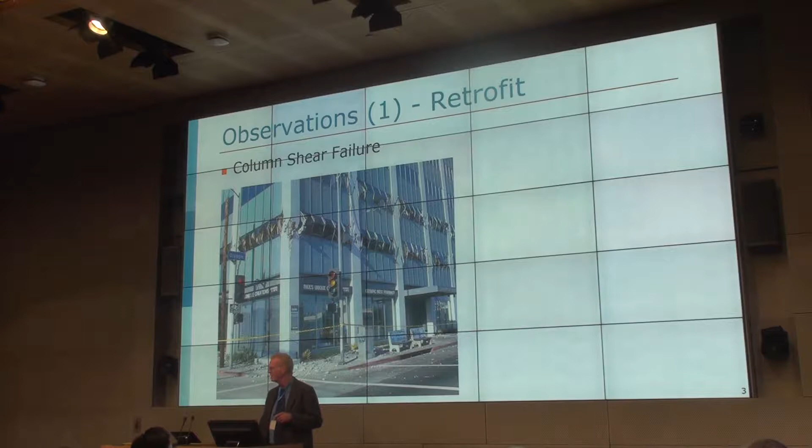Now the observations I can skip over relatively quickly because the previous speakers have kind of punched all the same slides I'm going to have up here as well. But I wanted to put these up there because it's important to set the stage. First of all, there's retrofit. We observed that in terms of existing buildings, we had some serious issues that we had to look at. That was abundantly obvious, whether it was columns or joints or walls and so forth. So that was a topic that certainly came about at this time period, the problem with existing buildings.

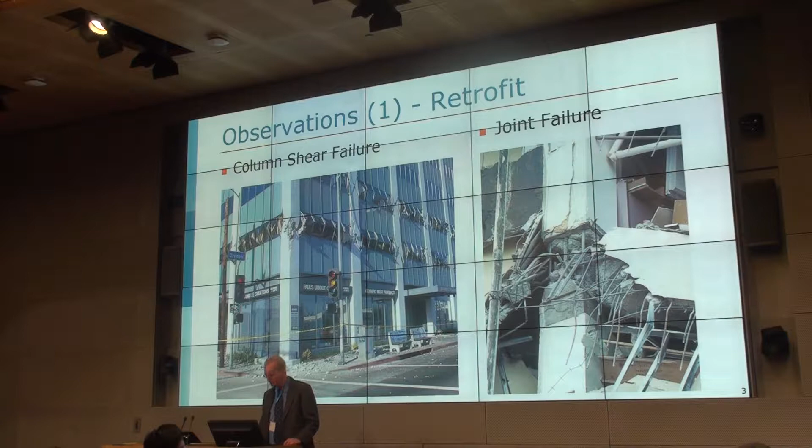And another one is a slab column punching failure for that Bullock's department store, which was certainly really interesting. We were very fortunate that many people didn't get killed, just because of the timing of the earthquake.

The other one that was kind of interesting was this idea of repair. Certainly no one really at that time was very worried about repair. We had the San Fernando earthquake and a lot of code changes had developed in the 80s and 90s, and this was the first real test of modern seismic codes. We certainly found out that we were doing better with new buildings, but there were certainly some issues. Existing buildings and repair are certainly big problems.

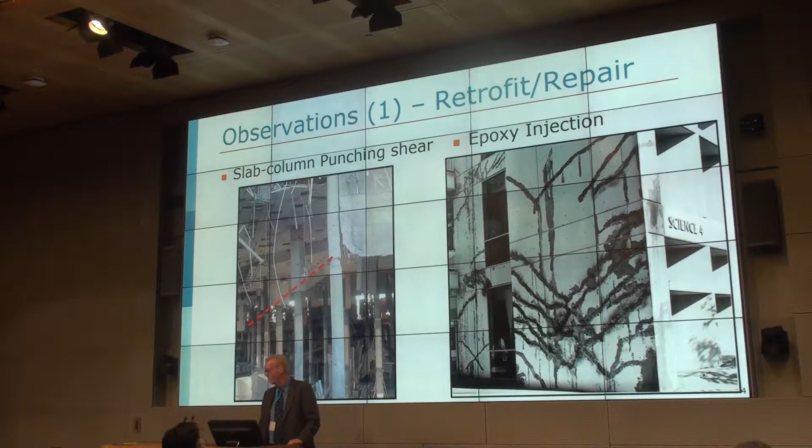Diaphragms, Jack mentioned this quite a bit, the fact that we didn't really worry about designing diaphragms, particularly these precast topped diaphragms.

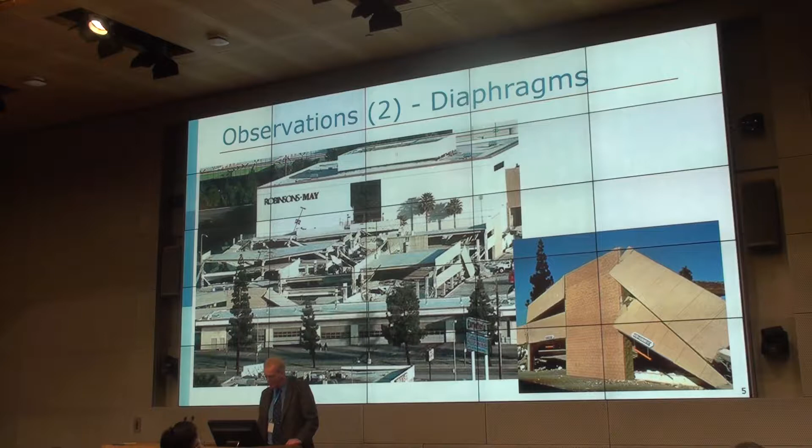And we were starting to do a wonderful job. We could detail columns that could almost bend over and touch the ground. So no one could tell me concrete couldn't be made ductile, but if you don't design the system and the gravity system is not compatible, the gravity system in this case basically failed and pulled down the lateral system. So we had this problem of compatibility.

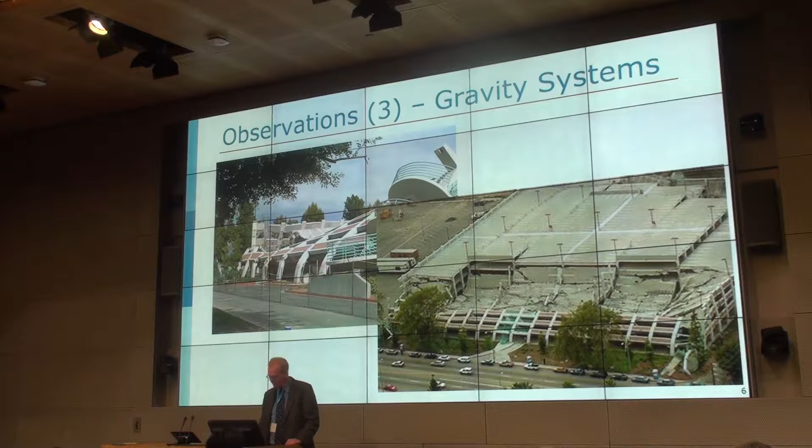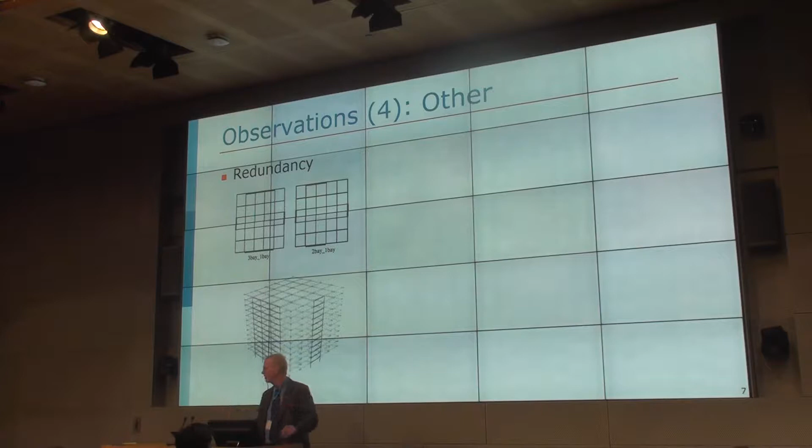I loved looking around to find something useful about redundancy. There are no good figures about redundancy other than all us academics that put 1 bay frames and then 2 bay frames and 3 bay frames. But nonetheless, that certainly became a topic of interest, the fact that we were starting to put all our eggs in one basket, and that's not a very good design philosophy. It also related to diaphragms, made them more complicated, and certainly nonlinear torsion became an issue once you started failing one side or the other. So there were these complications relative to redundancy.

Norm talked about ground motions, and I think particularly as structural engineers, we became interested, or at least noted, that there were these issues with being closer to the fault. When I started, California was basically zone 4. You didn't have to worry about anything else. It was simple. You looked up zone 4, found the Z, which was always 1, there was an S factor, and you were done. So it was simple.

I'm not sure we've come a long way with ground motions, to partially answer John Bray's question. They go up, they go down, and I don't think in some ways the ground motion side realizes how we actually design buildings with R and Cd and Omega. The granularity isn't there, I think, often to worry about whether the ground motion's going up or down 20%.

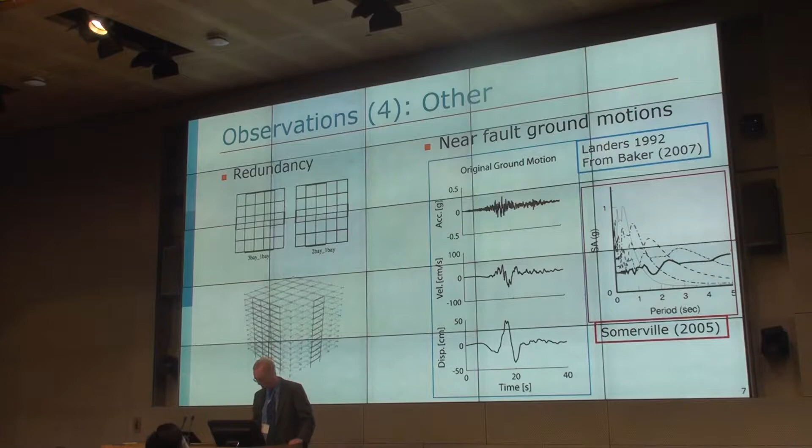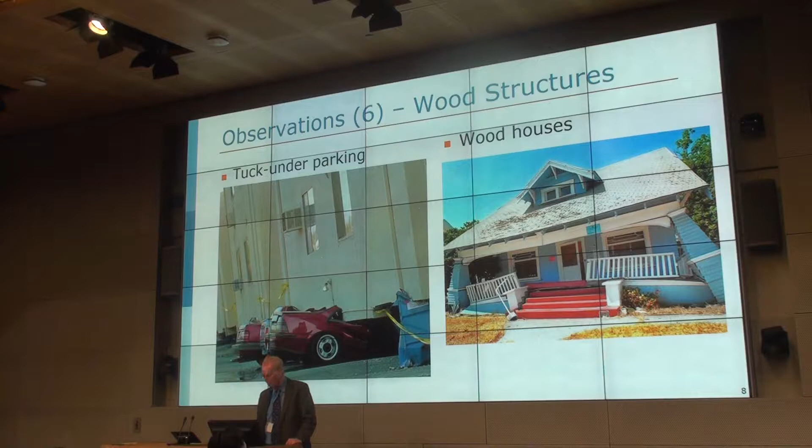Wood structures - we certainly had the tuck under parking issue with soft stories. And as mentioned, there's wood houses. We had the problem with connecting to the foundation and cripple walls and so forth. And as mentioned, there are some talks on that later.

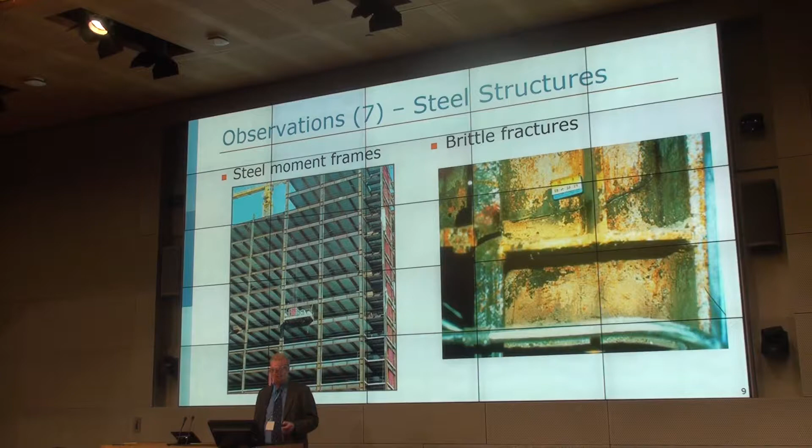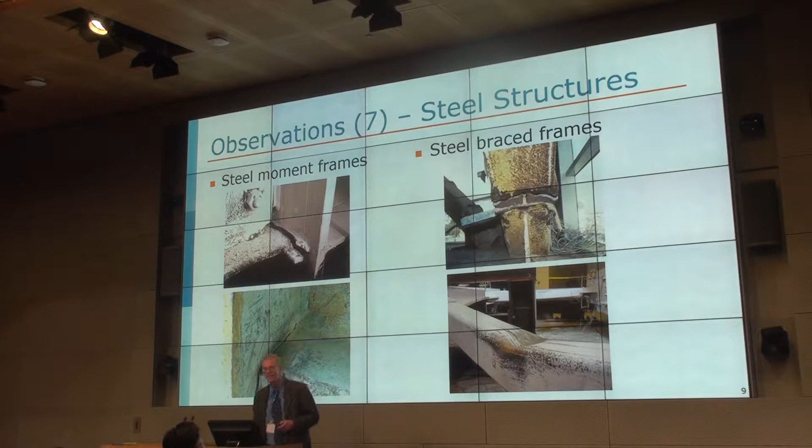And then in steel structures, particularly issues with brittle fractures were mentioned - brace fractures, fractures through columns, and some brace issues. So the idea that steel had no problems certainly came out, not immediately, but down the road. There are other things I didn't touch, like bridges, and Jack mentioned tilt-up structures. Those are certainly important as well. But when you start looking at the wealth of information and challenges, there were a lot of them.

So now quickly looking at what we've actually managed to get done in the last 25 years - certainly by Northridge, we had identified the need to retrofit existing buildings. And 25 years later, I think we still realize that buildings designed by the last building code may still need to be retrofitted in some way. We keep finding problems that we need to solve, which is good.

But looking at the progress we've accomplished in terms of guidelines and the research and data available for existing buildings, it's actually quite remarkable. It was just starting in 1994. Before that, it was like 75% of code, and in many cases, that's unfortunately what it still is. But we've now got guidelines.

FEMA developed the series - we're down to FEMA, ASCE 41. If you look at it now, ASCE 41 is something like 550 pages. The 17 version is very detailed. It's slowly gone through updates, maybe slower than many of us would like to see, but research is finding its way in there. So the development of FEMA 356 and 273, and eventually ASCE 41, that's a huge accomplishment over the last 20 to 25 years.

PEER research - as mentioned by Khalid and Jack - that focus on non-ductile concrete buildings has had a big impact, as has performance-based earthquake engineering. Those concepts were just in their infancy in the mid-90s. So that's a huge accomplishment.

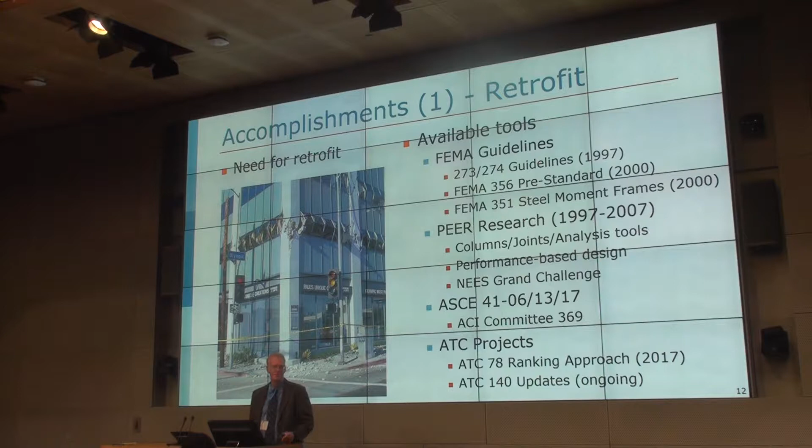Related to retrofit, there's also the effort on hospitals. I think our need - this SB 1953 - really pushed us to become better at retrofit and a little more creative. In some of the cases I was particularly involved with, we actually did building-specific testing to come up with a more economical retrofit strategy for a particular building. In some cases, you could really save a lot of money. This kind of integration, where researchers and practitioners actually get together to come up with a better solution, is something I've certainly enjoyed working on with many people in the audience, and many who aren't.

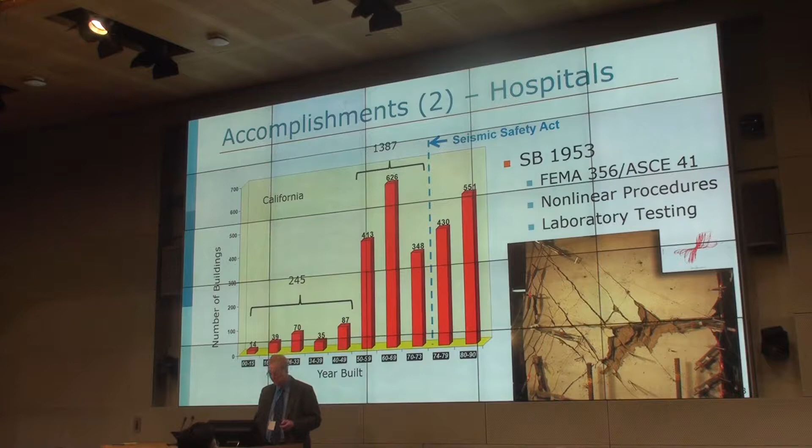In terms of retrofit, there's also the seismic ordinances - this is a big deal. We've got the LA ordinance for soft story wood and non-ductile concrete buildings. There are a number of other jurisdictions - Beverly Hills, Burbank - that cover non-ductile concrete buildings. There's also Santa Monica and West Hollywood looking at pre-Northridge steel moment frames. So this idea that we've got mandatory requirements, I think, is really important.

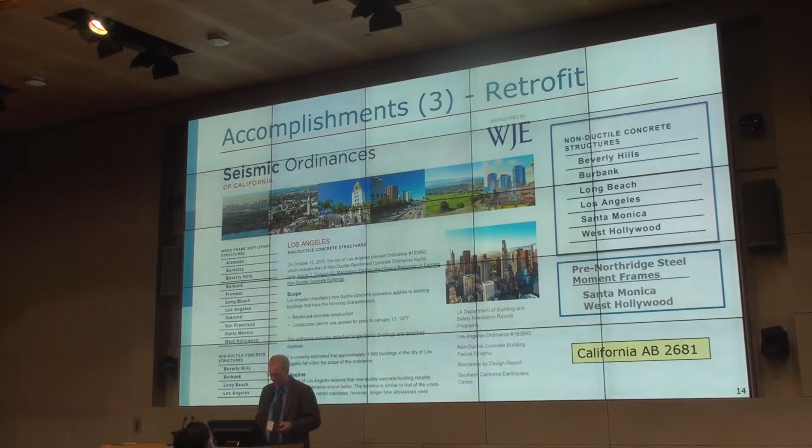It may be a little frustrating that it took 23 or 24 years after Northridge to accomplish that, but you also have to put it in context of how far we've come with analysis and retrofit approaches, and how much more educated our community is. Most of the engineers we're sending out of here at UCLA now are going out and working. I think it's trickled down as far as the amount of education involved in all the different firms. Now, it will take time.

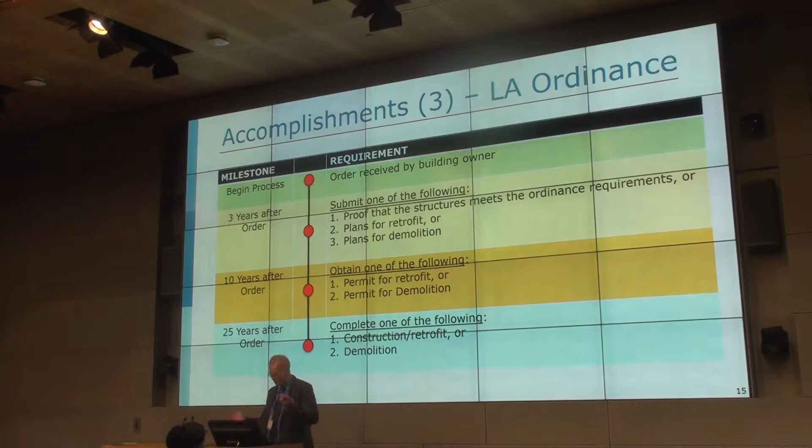So in LA, we're moving along into the 3 years after the ordinance, and we're making progress. We'll just see how long we have before that big earthquake hits, and how much progress we're able to make. But at least we're making progress, and we've got goals, and we're going to get there. We hope we'll get there faster than 25 or 30 years. Time will tell.

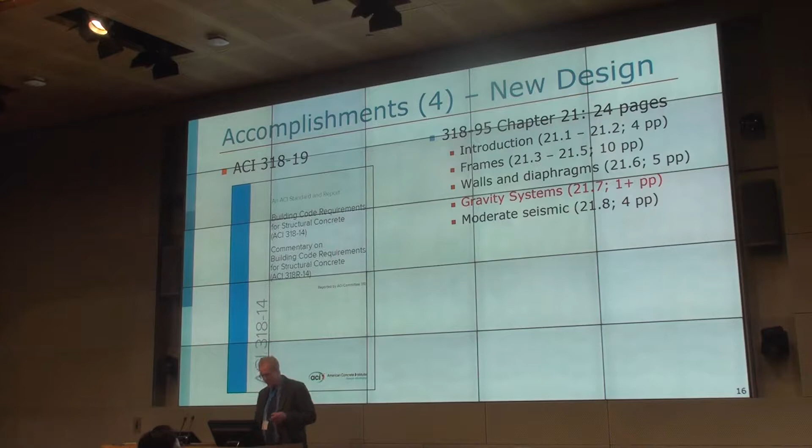Well, we go to the 14 version - it's more than twice as long. It now has foundations in it. There's a lot of material on diaphragms, and there's even more material on diaphragms in chapter 12, I think.

It's amazing the amount of detail, which is one of the reasons our engineers all need to get a master's degree in order to figure out a lot of this stuff. But certainly that's tremendous progress.

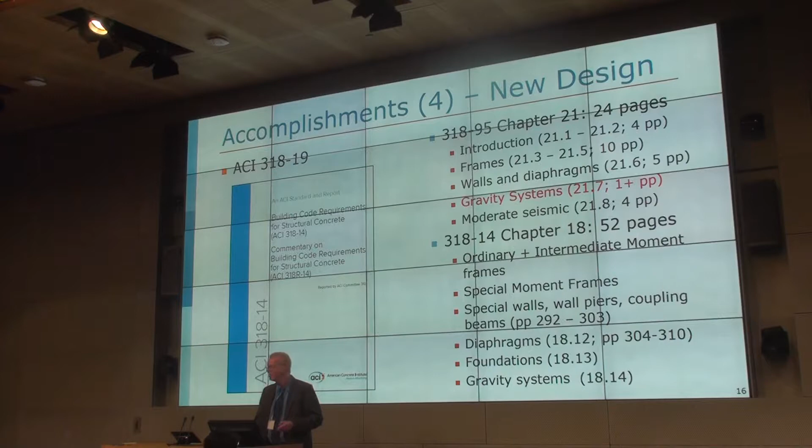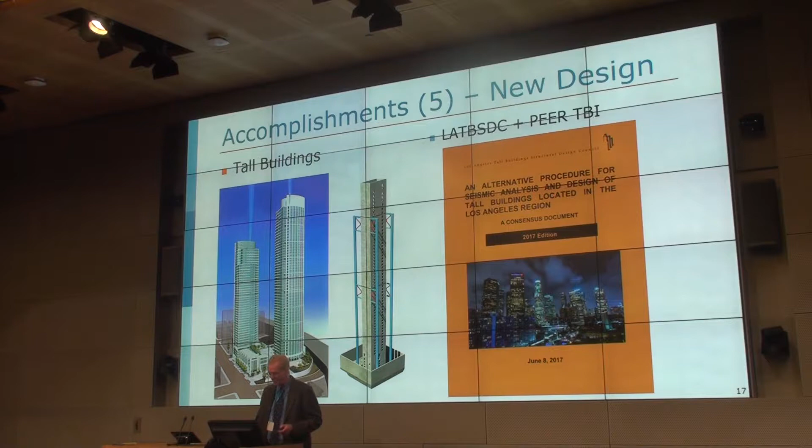The 19 version of the code has some very interesting material related to updates in seismic design, including new design approaches and integrating performance-based design for new buildings. Over the last 10 plus years, this has been a big accomplishment to actually incorporate sophisticated nonlinear analysis and design approaches into practice. This is certainly a big deal.

One of the things I've certainly enjoyed is the collaborative part of what we do. In terms of retrofitting hospitals, this is the St. John's facility in Santa Monica that got demolished shortly after the Northridge earthquake. I worked on a somewhat similar project with KPFF and OSHPD to come up with a retrofit strategy that involved testing. It was a big event in my life when I figured that it was really valuable to get out there and try to sell what you could do and work with other folks. I think we ended up saving the owners on the order of more than $30 million in this effort and giving them a better product, through all the tools that have been developed by many of the people in this room.

And then also internationally. I talked with a reporter a few days ago, and they said, well, we haven't had any Northridge in 25 years. What's driving our progress? Besides the improved laboratory facilities that we have, it's also international collaboration. They have earthquakes in Chile and New Zealand and Mexico and Japan, and now we're much better set up to learn from those experiences. Certainly those kind of efforts have been a big part of making progress.

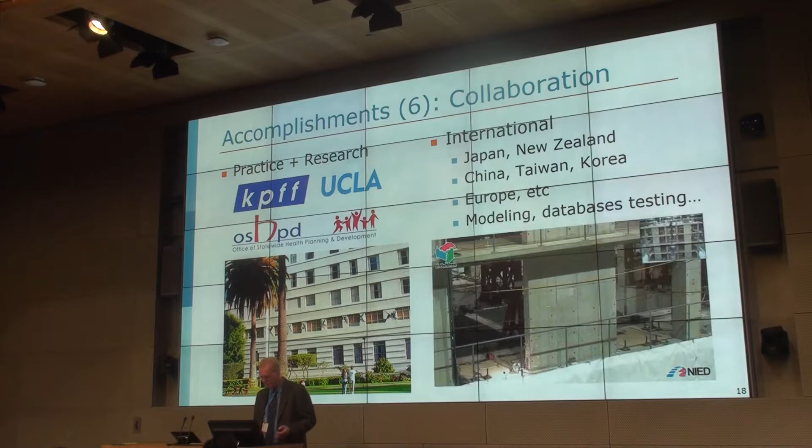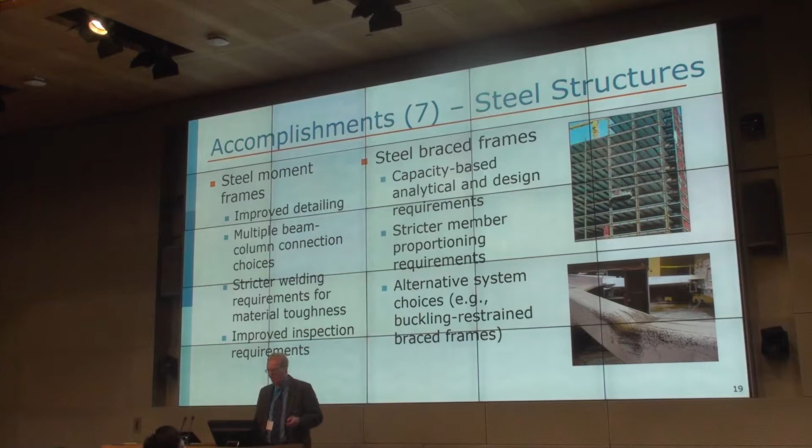I'll skip over the video, it doesn't really matter. Steel frames - I don't know much about this myself, but Tom Sabol told me, and Jim Malley told me, we've made a lot of progress, and it's listed here. I know this because I see how I used to teach steel design in undergraduate, and I thought it was relatively simple, and now I see that everything's gotten a lot more complicated. But certainly, we've made a lot of progress looking at the SAC project within PEER, and beyond, with requirements for steel structures.

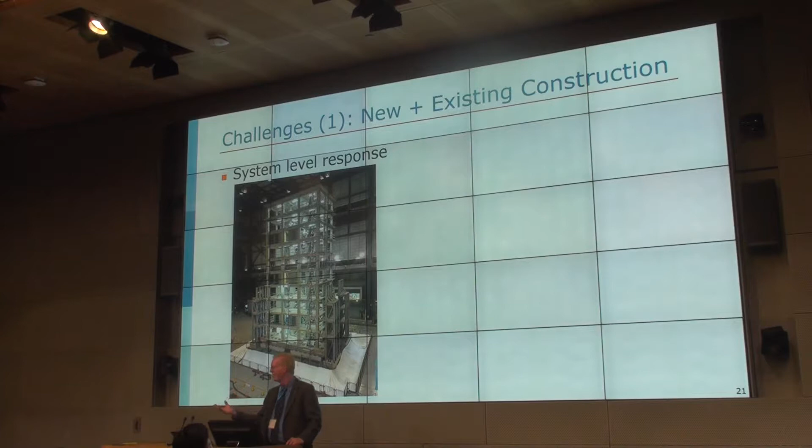I end up with a few challenges, and some of these have already been mentioned. System level response - almost everything that we did, if we design a beam, we design a column, we design a joint, we design a lateral system, and we often don't design the diaphragm or the gravity system. Everything's separate. I think one of our big challenges is to look at system level response, and this has been coming about more so in the last, say, 10 years, where there's a lot of interest in this area.

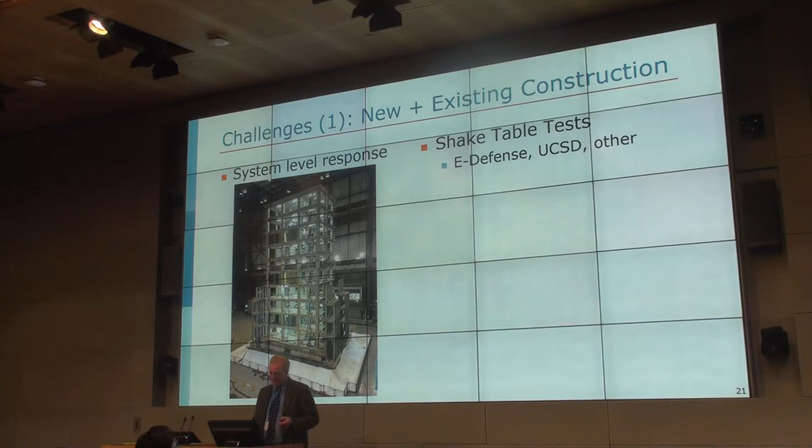So we can do that through shake table tests. But some of the challenges there is they're very costly, and certainly they need to be large scale, they're three-dimensional, there's a cost of instrumentation.

Another challenge is damage level. I was just in Japan last week for this test, and it was very interesting, but they barely pushed it into the nonlinear range because they couldn't afford to worry about collapsing it in their facility. That was certainly a challenge - that we sometimes can't achieve what we'd like in a laboratory setting, nor do we have the foundation and the soil and other parts of the system that are important.

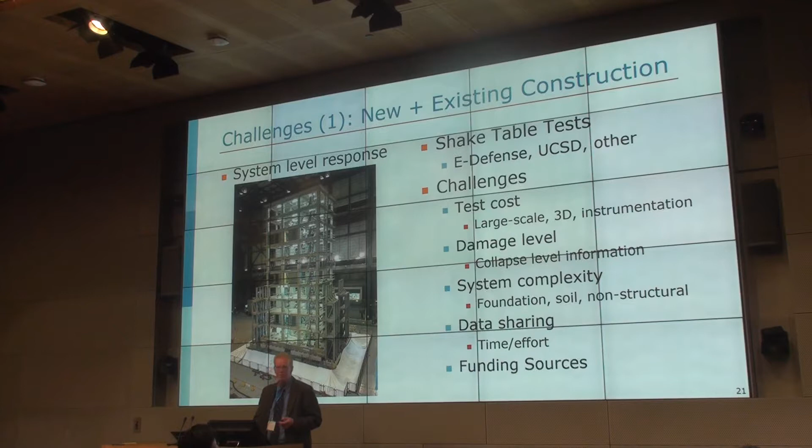Data sharing can be a challenge, and I think funding is certainly a challenge to get funding for these types of tests. So we need to pursue these, and collaborate internationally so that every test that gets done, we can learn the most from. And that's why the international collaboration, I think, is so very important.

Another part of this that's been mentioned is system level response, but not the system of a single building, but in the bigger community scale. That's certainly important, if resilience - how do all these things work together?

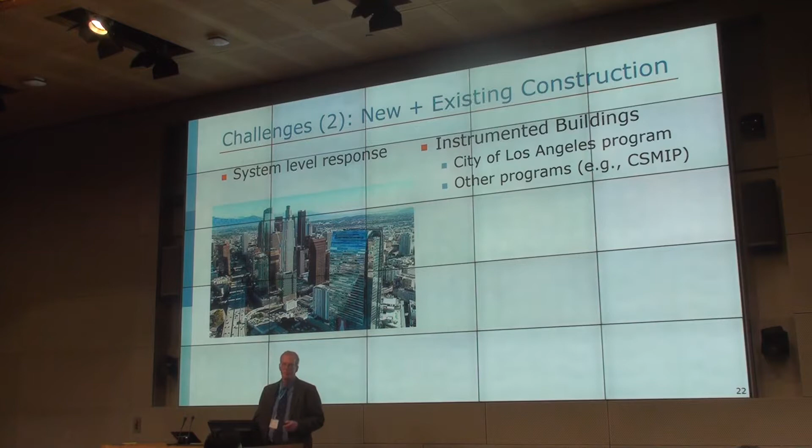I think there are challenges of how to take advantage of instrumented buildings in an instrumented city. We have a very important program here in LA to instrument buildings, and there are other programs, and we need to figure out how to take advantage of those in a framework that allows us to, when an earthquake or when some data become available, use it effectively. There are challenges here associated with sharing data in private buildings, sometimes triggered versus continuous data, and so on. Some of the more important things, I think, are instrumented density, but even more important, diversity.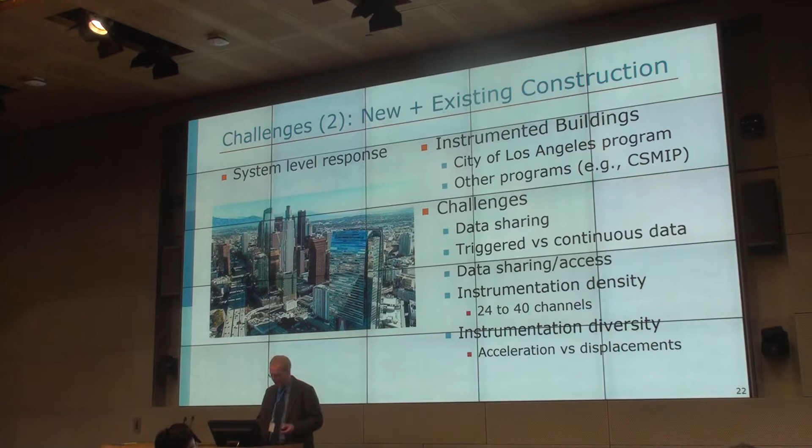We tend to always have accelerometers in buildings, and often we're interested in strains or curvatures, and we rarely have that kind of information available to us. But certainly a huge opportunity that we have to look at.

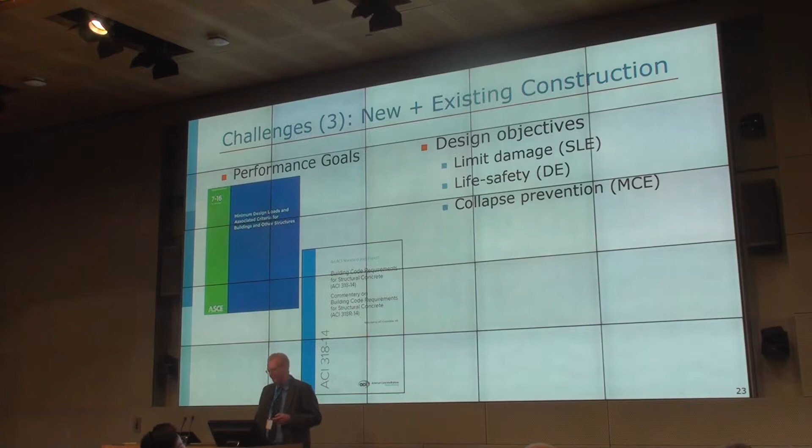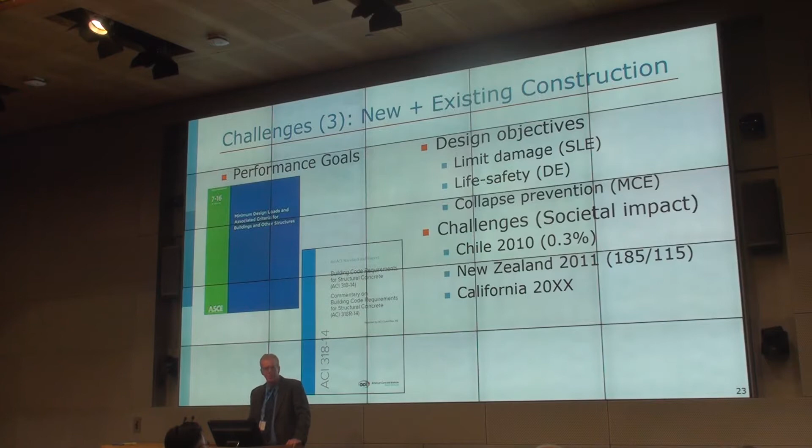Performance goals - the goals of our current documents are really life safety, collapse prevention. I think as we look to the impacts of Chile, New Zealand, and whenever California comes about - in Chile, the number of collapsed buildings was something like 0.3%. And as engineers, we'd have to say, hey, that's wonderful, we did a great job. But walking around Chile, particularly Concepcion, I didn't see a lot of very happy people. Our targets for performance, I think we really need to think about that more carefully.

And certainly that's coming about. So I think we have to look at higher performance structures, and particularly, again, existing buildings. As I said, everything's an existing building that's out there right now. There are a lot of issues that we identify, and we're slowly identifying ways to improve that.

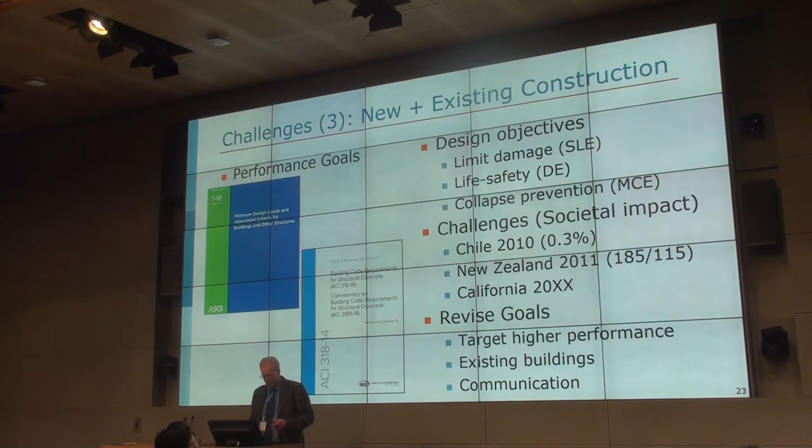Another challenge that we really haven't had to deal with in LA or California is as much related to repair. In New Zealand and Chile, they've had to worry about what to do with moderately damaged buildings. In New Zealand, I think it was primarily driven by insurance - insurance dictated that most of them were going to get demolished and replaced. That's probably not going to happen as much in Los Angeles because of the level of insurance.

But what is the capacity of a damaged building, and how do you evaluate it, and how do you make decisions related to demolishing a building or repairing it? We really haven't started to really look at that problem yet. And that's one that I hope we can get some progress on before a significant earthquake, because that's going to come up and have a very big impact on the economy and the ability for people to go to work.

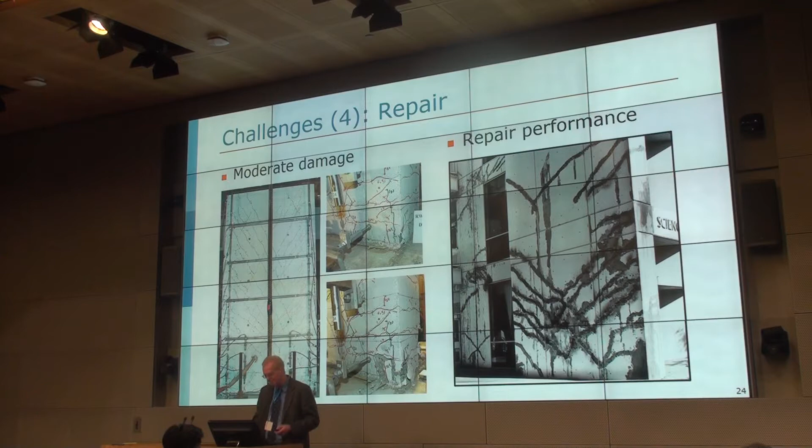And another one is in terms of resilience. This has been mentioned - Mary talked about this. So I don't really need to talk about this very much, other than we're slowly moving from this beam and column to a lateral system, to an entire building system, to a group of buildings, and now we're looking at buildings and interaction with transportation systems and electricity and water and so forth. There's certainly a lot of challenge there.

One of the bigger challenges is with some colleagues, you go out and write a proposal and you pull a bunch of people in, and you don't know where to send it because it's very collaborative and there's no program at NSF. In fact, recently Henry Burton and I - he tried to submit a proposal and was told no, it can't go into this program, and there's no place for it to go.

And often with funding levels that are available, if you try to put together a big proposal, you find that your budget won't work - it's a budget buster. So you've got $1.2 million as the biggest budget you can put in, but in order to do the project that you've conceived, you probably need $3 million. That's certainly a challenge that I don't think NSF and some groups have figured out how to fit into how we see research moving forward in the future.

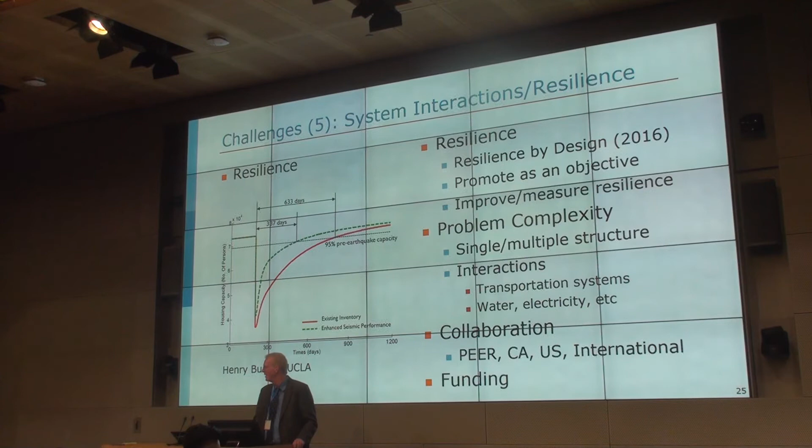I think California has to step up as well. If you look at PEER funding, it has remained constant or even gone down since 1997. And certainly we have a lot of exposure in California, and the level of funding just hasn't been there in terms of supporting PEER.

So outlook overall, it depends on your viewpoint - whether you're an optimist, a pessimist, I don't know if we're allowed to be a realist anymore. Not sure how that works, but the optimist in me says, well, we've made tremendous progress. Look at retrofit standards and guidelines and new buildings and databases that are available to us. We've made tremendous progress.

The pessimist in me says, well, we've done that over the last 25 years with more focus on earthquake engineering, and now we're a more mature field, and we face the challenges that I was mentioning earlier. So maybe our progress will slow substantially. I don't know. The realist in me says, well, there'll be an earthquake, and maybe that will change a little bit once there's some motivation.

But I am concerned that the general public thinks things are going to be much better than we think they're going to be. Everyone thinks their building's earthquake proofed, or even if it's a 1950s building because it survived the San Fernando earthquake. Those videos of Mexico are really telling - those buildings, most of them survived the Mexico City earthquakes, but they didn't survive the last one. Everything can be a little bit different.

So we certainly have a lot to do. With that, I'll close, and thanks for joining us here at UCLA, and thanks for your attention.